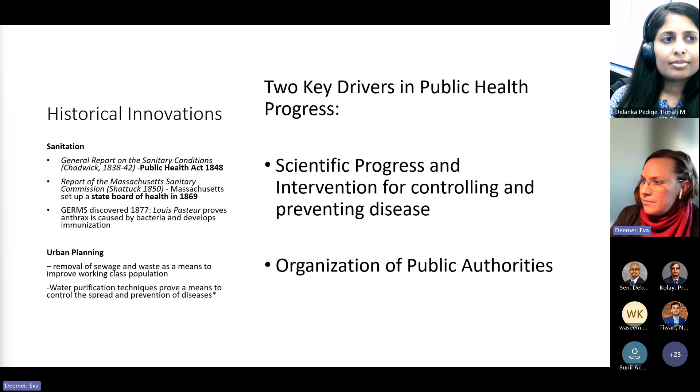And then also the very important thing that we maybe don't take into consideration as engineers is that we are making plans and we are organizing public authorities to make decisions around this planning for the public, for what's in the public good. So as we plan out utilities, as we bring in more treatment technologies to deal with, again, population growth and volume, we're actually organizing public authorities to make decisions on behalf of the public for the better good.

So where are we today? Why is any of this important? Because today, I'm talking about the 1850s here in the prior slide, but here we are today. This is a report that came out to the World Health Organization, and as of 2019, 1 in 3 people globally do not have access to clean drinking water, and 1 in 2 people globally do not have access to sanitation services safely.

So this is still very much an issue today. This is not going away. And even though we made these progress points in the 1850s, it is 2019 and we're still here. So what are we doing about it and how can we address these calls to action? One of the biggest challenges we have as engineers is there's a massive interdisciplinary community. There's environmental engineering, chemical engineering, civil engineering, there's now water resource engineering and these kinds of things. So there's actually a very broad interdisciplinary community that we all work in as engineers.

And so what we want to try to do is facilitate access to the exchange of best practices and improve the knowledge and dissemination of what these best practices are and get that information to the public and make that information available for decision making. The next biggest challenge we have is regulation, and we'll talk about this later today, but we've got to strengthen communication and take action to implement regulation, and we need to make this regulation around what is sustainable.

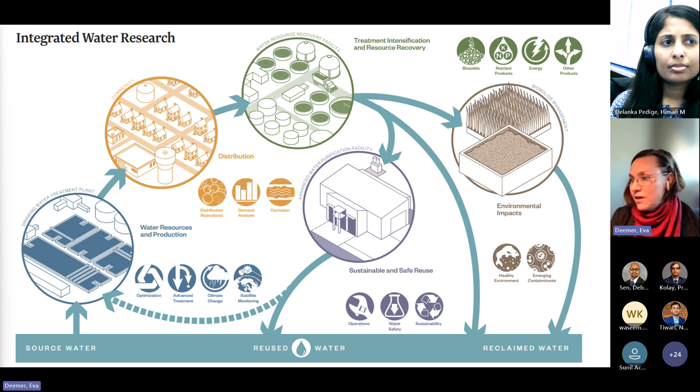So again, this whole diagram is kind of a complicated diagram, but you can see all the arrows go back into one source. So there's reclaimed water, reused water, and then there's source water, and sometimes this all gets blended into one thing. So with regard to the public, the types of things that engineers do that are really important are, one, we don't just solve problems, but we educate people on these issues.

What are you facing? So we might not think of that as part of our job because we're solving the problems, but in solving the problems, you are also communicating to the public the importance of the problem and potentially how regulations will impact them.

There's quite a few focuses on public health engineering with improving facilities. I think if you're in a consulting firm, there is a lot of talk about retrofitting wastewater treatment plants, and that can be a challenge in itself because you're, again, using aging infrastructure. We identify risks. So we look out for things that are coming up on the horizon, like climate change or population growth or both. And we look at our infrastructure and say, can we handle this?

There's another emerging issue with AI. If you're Meta or Google and you're trying to implement AI, there's a concern about how much water is available to those GPUs as opposed to the public. So if you're going to put in an AI facility somewhere, you call the utility and you say, hey, do you have about 20 million gallons per day that you can spare for our facility? And if not, they go somewhere else. So there's identifying risks, developing solutions, and being sustainable.

So the kind of skill sets that you need to do these jobs are, you need to have good communication. You need a good knowledge base, which I'm sure everybody here has a great background in their environmental or civil engineering disciplines. And you need to be good at problem solving to do that. But I think communication is something we as engineers sometimes don't think about as being that impactful, when in fact, that's how the public finds out about stuff.

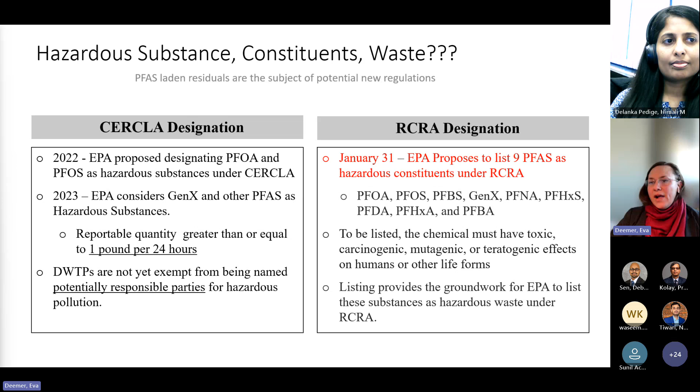So these are some of the minimum risk levels that have been identified by the CDC, the Centers for Disease Control, and why we're making maximum contaminant levels in drinking water around these PPT levels. So PPT, parts per trillion. So when we look at PFOA, 78 parts per trillion in an adult is considered something that is of concern for the CDC.

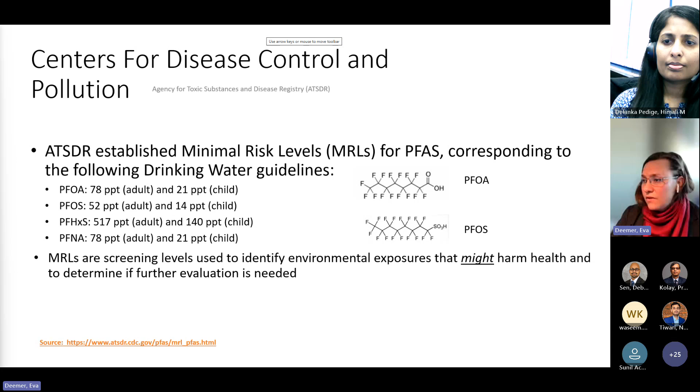And where are these sources coming from? Where are we getting this PFAS? So it's very hard to determine that. It's in our clothes, it's in all of our products, it's in Teflon tape, in Teflon. But when we identify it in drinking water, it's a big problem because we're consuming water every day, all day. So people have focused on starting there for regulations.

And where do these things end up? What should we be looking at, again, as engineers? When we take samples, where is this PFAS going to end up and where is it most likely to concentrate? So usually it's in the residuals of your treatment. So we have here a dissolved air sort of floating thing. Wastewater comes in here and we aerate it, and we're using some bugs to remove organics and that kind of thing. But then all of that drops out and becomes sludge.

And we can also throw in some coagulant material that's going to flocculate. And then we put it through maybe a dewatering belt and a gravity thickener. So we separate all the solids out. And this is usually where PFAS ends up in a wastewater treatment plant, in the residuals. So that's nice because we can take it out as a solid and deal with it. However, there's still some that's left in the water, and we're able to put it through a membrane process if you have one. Some people don't use a membrane process, and so it's just in their drinking water.

But membrane processes are a well-recognized technology for 99 to 99.9% removal of PFAS. So membrane technologies like reverse osmosis and nanofiltration are 30 years old. They're very well accepted by the EPA as a treatment technology that's highly capable. Again, as civil engineers, environmental engineers, we know there's a lot of exciting new developments out there, but people cannot implement them right away because there's not 20 to 30 years worth of data. So if I give you a palladium catalyst and say this is going to work, it needs to be time tested.

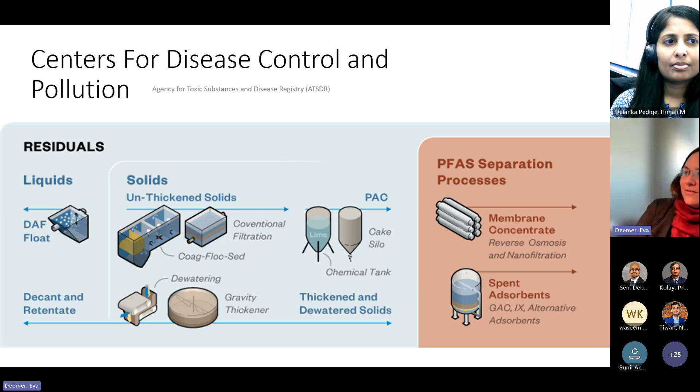How much does it cost? How long will it last? So these technologies are at least 30 years old, and they've definitely been time tested and are well accepted across a range of conditions. So it's great that you can take PFAS out from drinking water with the membrane process, but where does the stuff go after we've taken it out? We concentrate it. So we have to deal with that as environmental engineers.

This is kind of moving all over the place, but now that we know where these things come from and where they go, what can we do about it? And as engineers, again, we're kind of driven and also held back by regulations. So we can't just make suggestions unless at the state level you pass regulation, but we can't just make suggestions to take it all out because it's not necessarily regulated.

So just to kind of give you a timeline on how tricky it is as an engineer, especially if you're an environmental engineer right now. Basically on May 26th of this last year, 2024, you had an issue where Tucson International Airport said, we're going to designate this a Superfund area and we want this cleaned up. And we know that this is getting in our drinking water and we didn't put it here.

So as of June 11th, in 2024, the Air Force requested that the EPA pause this order, and we're not going to do anything about it because we're not really sure we're legally liable. That's what the Air Force said. And so on June 28th of last year, the Chevron ruling came out. And I don't know how many people here are familiar with the Chevron ruling, but the Chevron ruling essentially gave the power to federal agencies like the EPA to make regulation based on people's professional input in science.

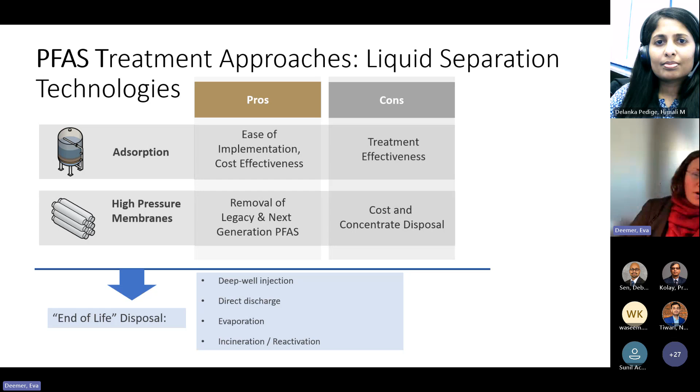But still, we're really not solving this problem. We're not destroying the PFAS. We're just moving it around, taking it out and putting it somewhere else. So we need to look into PFAS destruction. And these are really, really emerging technologies. We really don't have a tried and true PFAS destruction technology that has been out there for years and years. We have a membrane technology that will take it out for you, but again, you're still concentrating it and have to do something to get rid of it.

So these on the left-hand side are types of destruction technologies. You can get supercritical water oxidation. Photochemical degradation is a method some people use. There's non-thermal plasma and hydrothermal liquefaction. One of the most common is electrochemical oxidation, and that's something I'll talk about that I worked with over the summer. And these are the contaminated matrices over here on the right side.

You have landfill leachates that are really high in PFAS, all those solid residuals. You have stockpiles from firefighting materials that are really, really bad, that we have to essentially designate as hazardous waste. You have spent adsorbents, so all that GAC or any ion exchange that you might have used to get rid of PFAS, you have to do something with that GAC and that solid. Again, firefighting residuals.

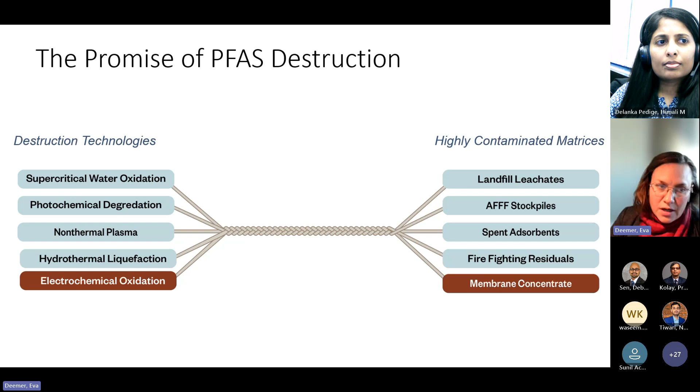So membrane concentrate. We can look across the state of Texas, or across the entire country, and see different membrane treatment plants, and get an idea of how much concentrate is made from those daily. Here in El Paso, we have the largest inland desal plant in the world, and we produce 27 million gallons per day from that desal plant alone. And that's only 5% of what our city consumes a day. So membrane concentrate is also a big area of residuals for PFAS. So what are we doing about that, and how emergent is some of the technology?

So this summer, I got the opportunity to work for Hazen and Sawyer, where one of our clients was a startup company called Aclarity. And we submitted a proposal to the USBR to do a destruction technology pilot with Aclarity, and they used an electrochemical destruction technology. This was a very interesting pilot, one of the largest and longest pilots out there. We did a 60-day trial of PFAS destruction at the Brackish Groundwater National Desalination Research Facility in Alamogordo.

This is a really neat national lab that the USBR owns, and it has 4 different wells within the site. One of the wells, well 2, is really high in calcium sulfate, but it's also very high in PFAS. And so if you do a technology on well 2, they're very serious about making sure that there are absolutely no groundwater leaks at all.

There's a berm here, and all of these pipes and all of the plumbing had to be really solid. We were on well 1 for a long time before, doing leak checks to ensure that once we switched over to the PFAS well, we were not going to spread PFAS anywhere. If we had a large leak, we would actually get this facility sued. So there was a lot of plumbing that was done for this technology.

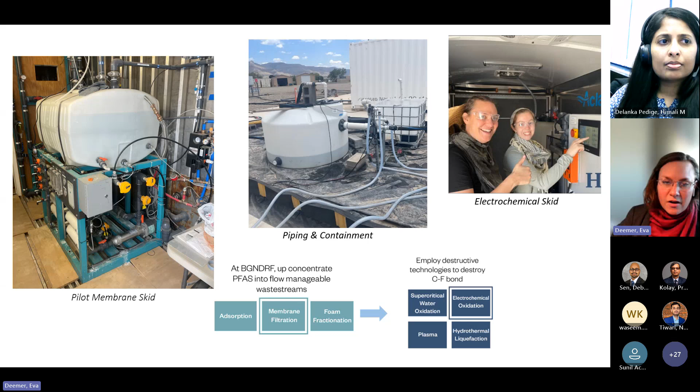So this was a continuous test over 60 days. And if any of you guys have run pilots, you might know how challenging that is, because stuff breaks and goes down. But essentially what we did was a membrane filtration, electrochemical oxidation with some electrodes.

And so again, I want to emphasize that there are no really commercially available treatment technologies outside of maybe Ovivo technologies, and they even purchased it from a startup. So there's a fledgling of startup companies and different things that you see when you look into PFAS that are just not yet fully established. So there's a lot of challenges with this that people are still ironing out for treatment and to meet these regulations that are coming out.

And I'll tell you from personal experience that the startup company we worked with as a client, they were on cloud nine in April. They were like, this stuff is getting regulated. Everyone's going to need our treatment technology. The regulations are coming out. We're ready to meet the challenges and break down these technical barriers so we can meet those challenges.

And by June, by the Chevron ruling, it was like a roller coaster for them. All of a sudden, oh, there's no way to enforce these rules. There's no way to enforce these regulations. So that is something that we don't necessarily consider as engineers, that the market sometimes is beholden to these rules, and they are sometimes political and sometimes they change, or it's a process to pass a law.

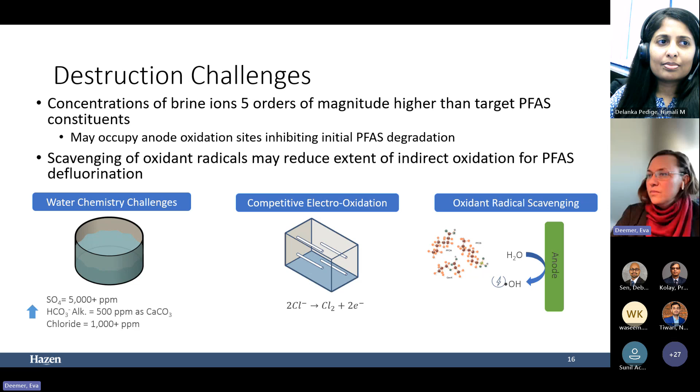So why do we care about any of this stuff? I'm going to speed through this PFAS stuff because, again, there's a ton of technologies out there. There's a ton of research being done. But the point of all that is there's still no commercially available treatment technology that is proven, that is time tested and has been used for years. There's a lot of technologies to remove PFAS, but there's like two commercial technologies that are like 5 years old that are for destruction of PFAS.

So why do we care? It's because we are driving towards reuse. We have to use every drop that we are treating. We really can't afford to throw water away. So we're looking at ways to recover that 4 gallons in that 60% recovery equation, that 4 gallons of concentrate. We really want to get as much as possible out of that.

So this is sort of a graph to show you, and you guys are where? Where's Illinois? So I'm down here, I'm in El Paso, Texas. You guys are over here, and you can see the whole green area. You're getting all this nice water that's coming back through your groundwater because it's raining, and you have snow and precipitation and that melt, and rivers and whatnot. And here I am over here in this little brown area that's sort of light green.

And so there's different drivers around the country for water reuse, but one thing is certain, we know that we are running out of groundwater in the country, period. We'll all face that. Some of us are facing it out here on the west and the southwest a little bit faster than, say, in the Northeast and the Mid-Atlantic, but the problem persists for everyone. And so if we're trying to squeeze as much water out of that 4-gallon concentrate as we can, we have to deal with PFAS. We have to deal with emerging contaminants. We have to deal with the stuff that's in there.

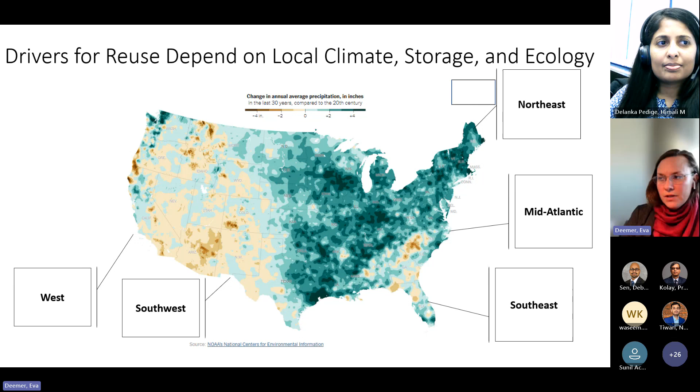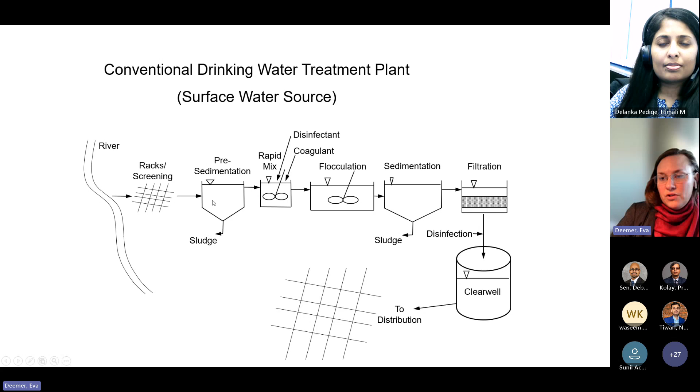And then you kind of get all the way over here where you do some type of filtration, and then you add disinfection, and you send that out in the pipes in the distribution system.

So this is an activated sludge municipal wastewater treatment plant, sort of the same thing, but instead of taking surface water and river water and treating it to drinking water, you're going to take raw sewage, collect that, get it through all of these: the primary sedimentation, biological treatment, secondary treatment, and then finally tertiary treatment.

And I'll kind of hurry along here because I know we're getting short on time.

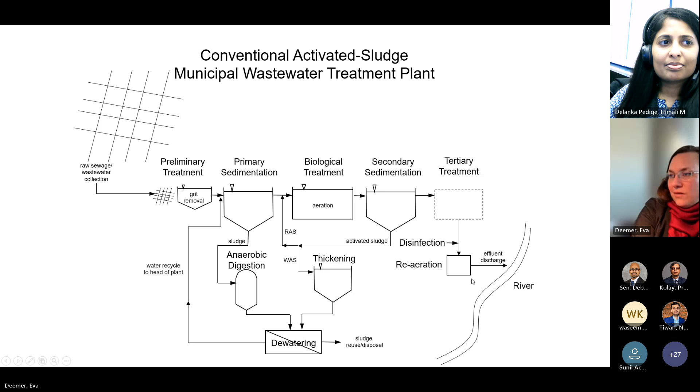Basically, after this tertiary treatment, we put it back into the river. So then we get back to this drinking water plant. So you have this kind of relationship between a surface water plant and a wastewater treatment plant, where you have a wastewater treatment plant that is kind of downstream from a drinking water plant.

So we take raw sewage from wastewater, treat it to the point where it's somewhat drinkable, or get it through tertiary treatment, and then we put it back in the river. And then we pull that out and use that as drinking water and treat it to drinking water standards. So that's called de facto reuse.

And you can start to see really quickly that if we're introducing things into wastewater treatment, we're going to deal with them in drinking water treatment, period. You cannot separate the two, even if they're at different locations and different plants. So how are we going to reuse water? There's lots of ways that we can augment water reuse.

In Orange County, essentially, what they do is they get the water to a drinking water standard, and then they inject it into the ground or their aquifer, and that's called direct potable recharge. And what they found out through these emerging scenarios was that at some point in time, 10% of all their groundwater became treated wastewater, and they were very happy about that because they felt that they were managing their water issues, but in fact, they injected their groundwater with PFAS unknowingly.

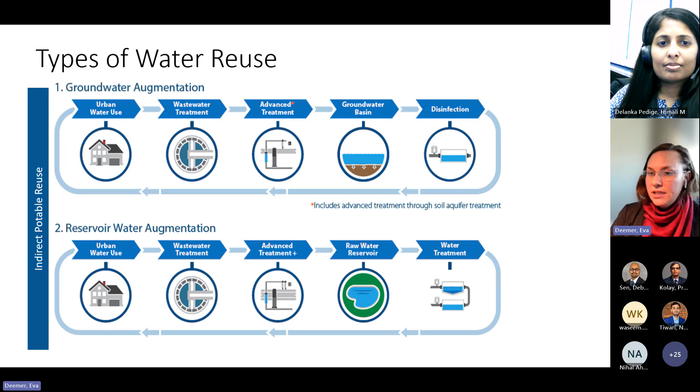So another way is you can use a reservoir to do this. El Paso Water is doing this now, where they have a very large arroyo and they're treating wastewater and then flowing it through this arroyo where it's sinking back into the groundwater. So that's another way. But both of these techniques essentially put it back into the environment, either as groundwater or surface water. So again, these are some complicated issues surrounding water reuse, and we cannot really remove pollution until we destroy it. We're just pushing it around and dealing with it later.

And further, there's very few states and very few cities that are doing what's called direct potable reuse, which is treating water to drinking water standards from wastewater and being able to drink it. That's where we're eventually going to be able to be sustainable throughout drought and be drought proof, is to take the water that we're using as a population and get it back to drinking water standards and drinking it.

So again, this complicates things. If you're sitting in a professional firm, like I was at Hazen, there's Garver, Carollo, Trussell. There's quite a few consulting firms that you can go work for as a civil engineer, as a PE or environmental engineer. This kind of complicates your job when you look at this from a national level.

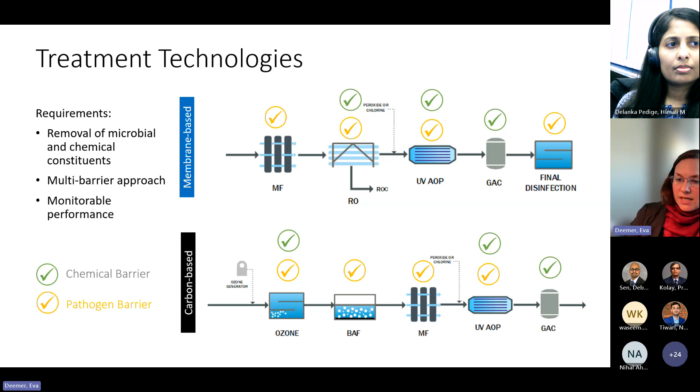So again, the main takeaway here is that these are tried and true. They are very inexpensive because we're taking some surface water sources, but as you get into groundwater, you have issues with the level of salts that are there. Here we have a lot of brine, but we need to diversify the number of water sources we take in, and they're not all the same across the country.

So treatment technologies, we as engineers face a lot of challenges when it comes to fitting technologies for your client or for your city or whatever, in that you don't have a technology that's a one size fits all. Everything is a pilot, unfortunately. So that's why you guys do get paid lots of money, is you're de-risking that type of technology. You're looking into it as engineers. You're designing, making designs around contingencies and around what is present in that water right there. You could move 250 miles south and it's completely different.

So again, the types of technologies we choose are based around mandated standards. So what is the TDS level requirement? What do we have to remove in order to meet standards and health standards here in this city or this state? Are the things we're removing and treating going to be compatible with an aquifer or not? Are we going to be able to put it back in an aquifer? And then are we going to have constituents in our groundwater that will not be compatible with disinfection?

So if you have a groundwater source that you're treating with this RO and it has bromide in it, you can produce byproducts by chlorinating your water, and that is dependent on your source water. And then finally, if you're going to implement very advanced technology like RO, you're going to produce stuff like concentrates. So do you have a management option for that?

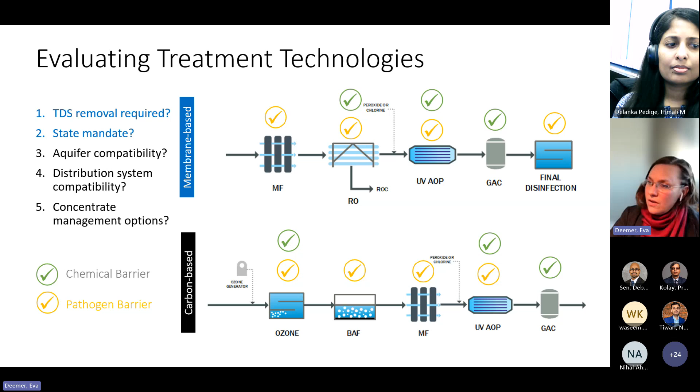So there's always a trade-off with advanced technologies in that you produce another problem. So we as engineers, a lot of times we solve a problem and make two more, and we have to consider that later. So again, this is sort of a graph that we have from Hazen on the drivers for the Orange County water system, groundwater system I was talking about. They were very proud and one of the first groups to lead direct potable recharge, which then is a precursor for direct potable reuse, which is the drinking part. Direct potable recharge, we treat it to drinking water standards and then re-inject it.

So they were depleting their groundwater. They were like, let's do something to put it back. They didn't want to do something too intensive or too energy intensive. So they basically treated their water again to drinking water standards and then injected it back into the ground. So they also employed an RO and essentially had to do something with that concentrate. And they did not treat that concentrate for PFAS for like 10 years. I mean, nobody really knew about PFAS 10 years ago, or it certainly wasn't on the radar. Now it's going to be regulated.

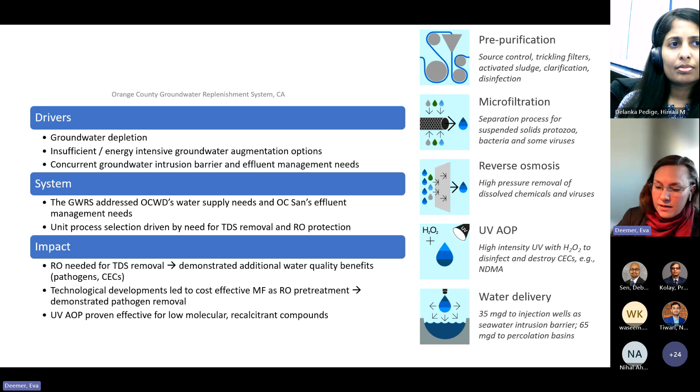So now they're at a point where just as of last year, they were like, we thought we were responsibly recharging our aquifer, but in fact, we were injecting PFAS into our aquifer. So again, the drivers were the depletion of groundwater. Let's treat some water up and put it back. And then we ended up polluting ourselves.

This is a lot of content, but mainly my takeaway from all this is as engineers, you are actually doing what's in the best interest for the public, and you have to make a lot of complicated decisions for people and for engineering. And you might not think about it now because you're more concerned about fixing the problem and solving the problem and getting numbers and getting data.

But in fact, what we do is a lot of advocacy for the public in making these decisions. And a lot of the public doesn't understand how complicated, how long this takes. So those are some of the challenges that you face: again, communication, regulation, aside from just the problem solving that you have.

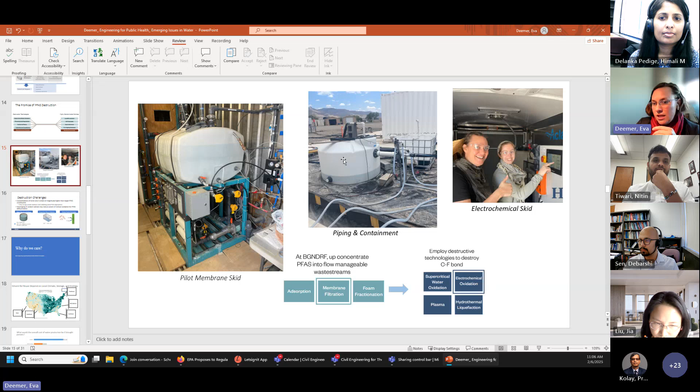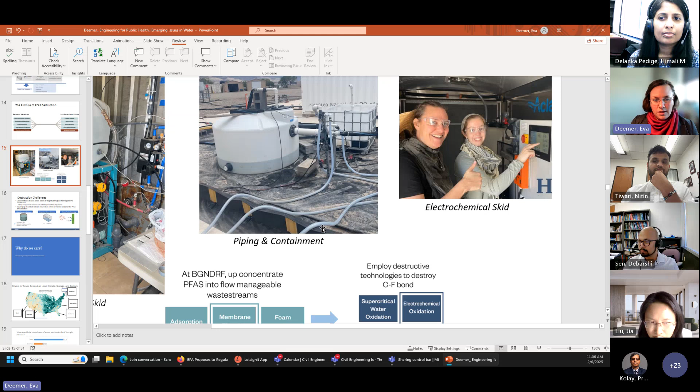And this setup that you're seeing is a nanofiltration membrane skid that then sent concentrate into a holding tank that they would take into this trailer. And this is the feed tank kind of back here. Let me just sort of scroll over to show you this trailer. So they essentially had a reactor right here, and they had a 30-gallon feed tank, and they ran continuously at 1 gallon per minute. So we had to run this membrane skid at roughly 5 gallons per minute or more to be able to produce a gallon per minute concentrate for them.

So that is an idea of the pilot scale. At pilot scales, you're usually doing, again, gallons per minute. So if you have a problem, it's going to be a big problem. It's not a liter per hour or a couple liters or milliliters going through a column. Like, this is all continuous based. And at 5 gallons per minute, you know, you're talking about 60 gallons in 30 minutes or more. And my math is off on that.

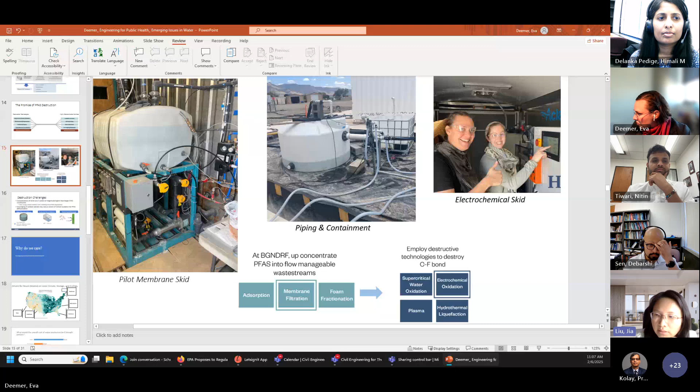What is the water quality originally before this membrane treatment unit, and what is water quality after your electrochemical oxidation? So do you create some other PFAS or other problems or byproducts? Yeah, so that's actually a good question. A lot of the challenges in PFAS destruction are centered around how much other constituents are there. And basically PFAS was on a ppb level, and we have calcium, magnesium, sodium, potassium at very high levels, at milligrams per liter, 5 orders of magnitude higher than the actual PFAS.

So the actual water quality here, we had about 500 ppm alkalinity. We had 1,000 plus ppm chloride, and we had over 5,000 ppm of sulfate in the water. So this is a very high scaling water that has a lot of calcium sulfate in it. We're close by with something called White Sands, which is nothing but gypsum and calcium sulfate. So calcium sulfate precipitates. One of the challenges with electrochemical oxidation and PFAS destruction is that you produce a lot of OH groups, a lot of hydroxides, and these hydroxides will precipitate with magnesium and calcium quickly. So the water quality, that kind of gives you an idea of 5,000 ppm. That's like 5 grams per liter of sulfate alone.

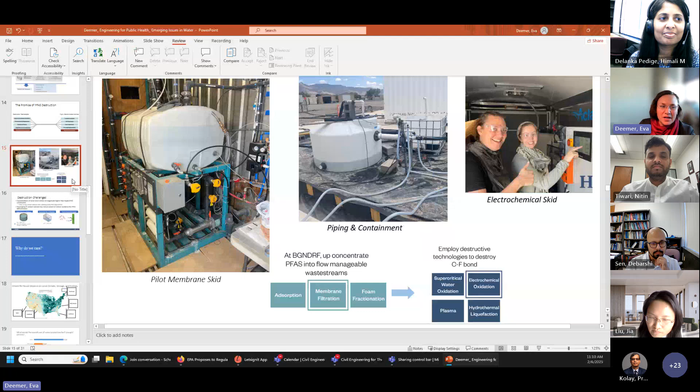And then these challenges will exist for any of these technologies, where if you're going to concentrate, or if you're going to take a brine and try to destroy PFAS, you have everything else in there, and it's going to depend on the source water. To your point, what is the water quality coming in, and what is the water quality getting concentrated to, and what are we feeding to them?

So they ended up producing quite a bit of magnesium hydroxide, and it inhibited all of the destruction. So we would go through testing where we would ramp up voltage and then pull it back. So we would try not to precipitate stuff, and then when we did, we'd pull it back. There's efficiency and longevity, and those things are sometimes a trade-off.

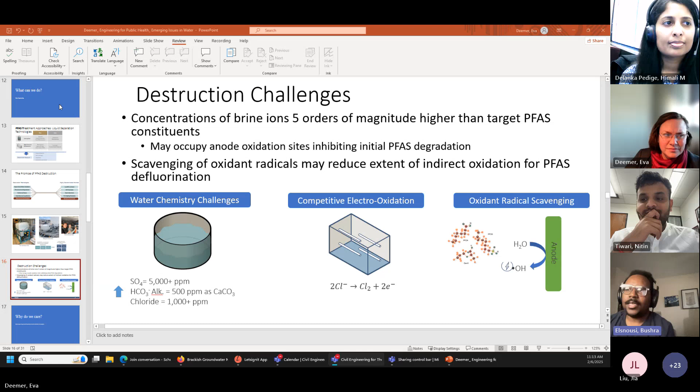My question is about the huge gap that seems to exist between the scientists' findings and recommendations and the actual implementation on a governmental spectrum. Ideally I would like to think that a scientist would justify his findings using the scientific method, and that would end his responsibility. However, that is not the case, especially where public health is concerned. So my question is, what can we do to bridge that gap?

That's a great question, and this is very complicated. So real quick, as the multidisciplinary person in me, there's a big difference between scientists and engineers, and they can overlap. I'm a scientist and an engineer, but science takes a perspective from a very limited angle. And yes, we can reproduce this, and we apply the scientific method to verify our findings and draw conclusions.

But as engineers, there's a wide variety of problems that we have to solve and design around. And so scientists aren't necessarily concerned with implementation or making the solution for the problem as much as they are describing, defining, and outlining that problem and maybe where it comes from and why. As engineers, we want to know what to do about it, right?